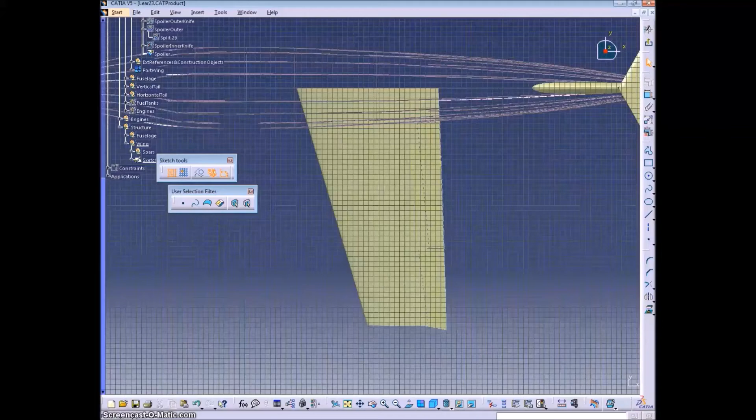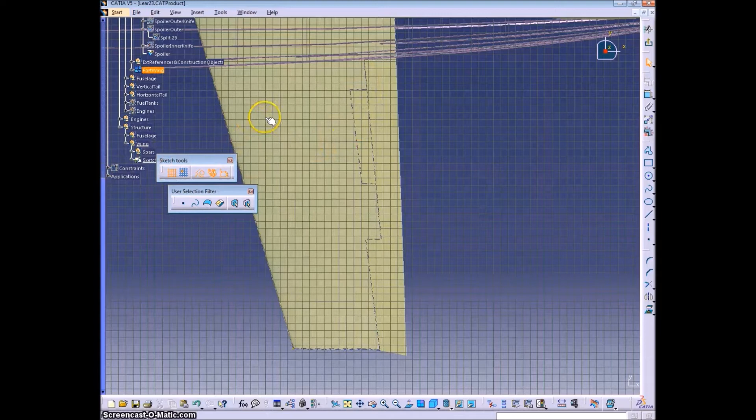This video will show how to add ribs to the wing structure. It is essentially the same as creating the spars, except the lines will be parallel to the chord of the wing. But we'll start the same way. We're going to make a sketch on the XY plane.

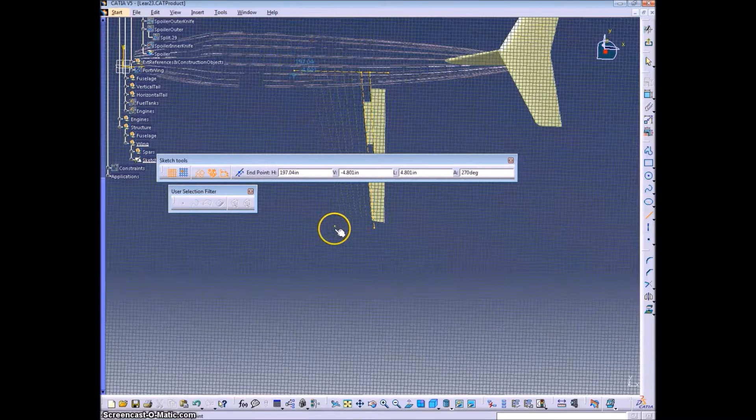And we'll get some guides in here, being the back two spars, since the second to last spar is the last spar on the outboard section of the wing. And then we'll also get the leading edge of the wing. And then we will draw lines which will represent the locations of the ribs. Again, this is a sketch in the XY plane, which will get projected up onto the wing, which will give us the outline of the ribs.

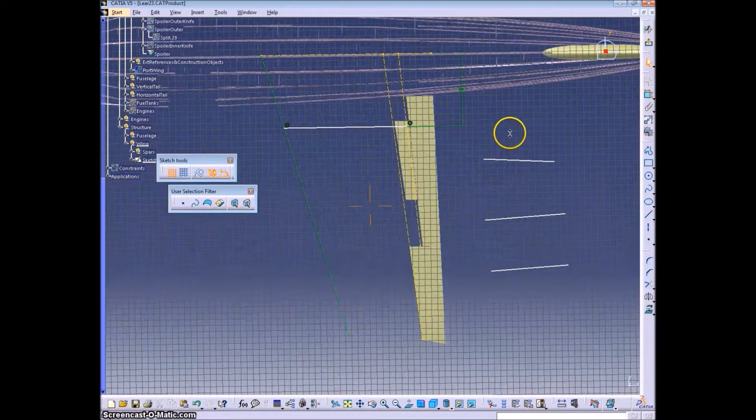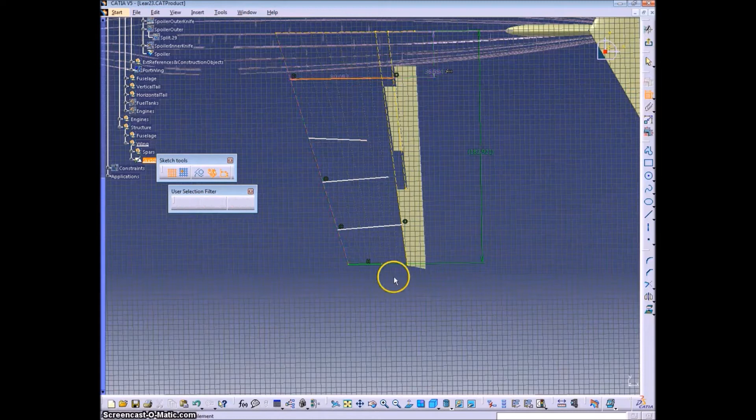We want these lines to be coincident with the leading edge of the wing and then the aftmost spar at that point. And of course we're going to space these evenly, just basing this off of the cutaway drawing. In reality, the spacing might increase as you go outboard, but here this is just a representation. I don't have exact dimensions.

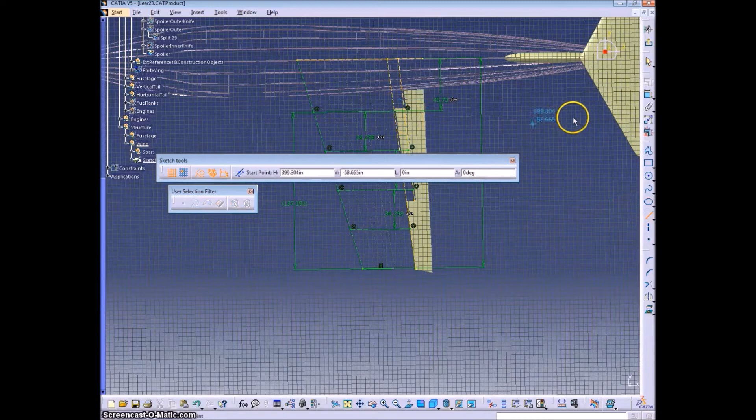And what I'm doing here is creating lines that are a little bit longer than what is necessary, just so when we project it up, we make sure that it intersects everywhere that we want. So I'm going to create these lines to be, I don't know, 1.5 times whatever the dimension is in that location. So do that and then do a formula.

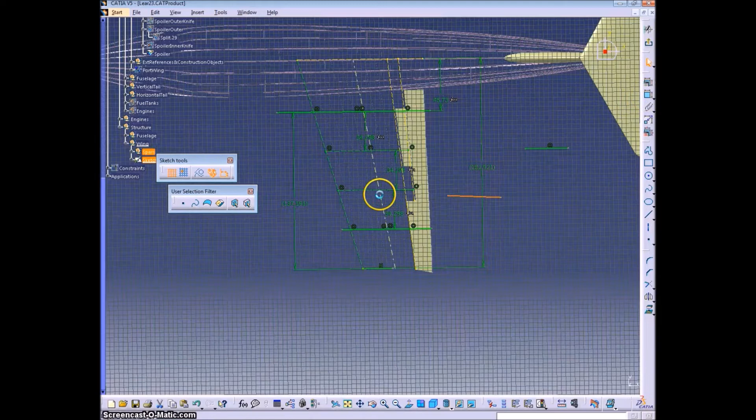Now this is a really, I think, a poor way to do it. I don't know why my past self decided that this would be a good idea, but a much easier way to do this if you want to make the lines longer than necessary is to just draw a vertical line in front of the wing and a vertical line behind the wing, and then make it coincident to those two lines instead of multiplying by 1.5 every time. Either way, it gets the job done.

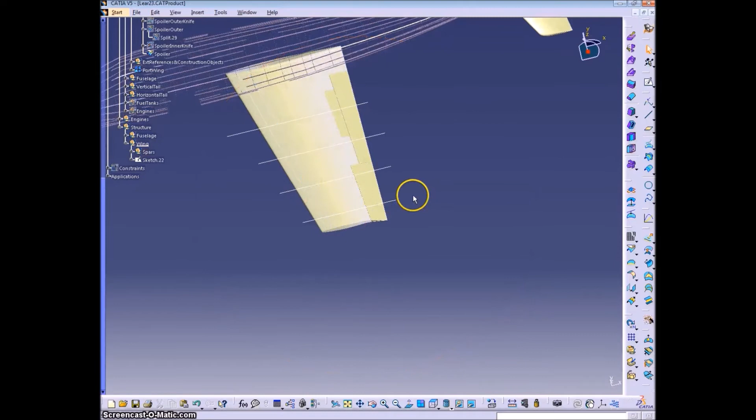What I was describing there is exactly the same thing that I did for the wing, though, where I created a line past the edges. Well, starting from the center line, but past the outboard edge. And I made the spar lines coincident to that. So projecting these up onto the wing, you can pretty much see the outline of what the rib would be. There are a few gaps that we'll have to fill in with lines.

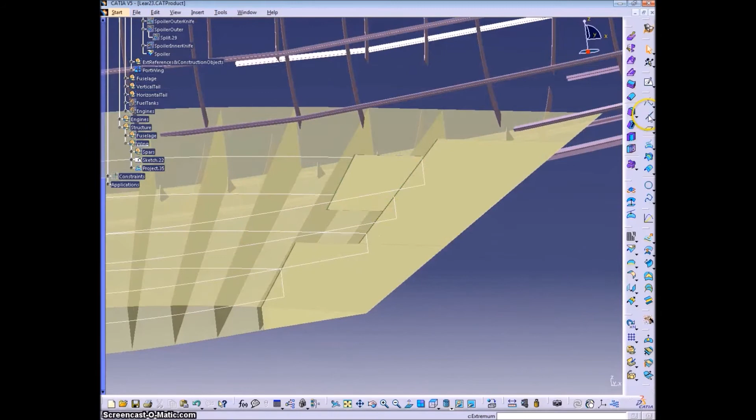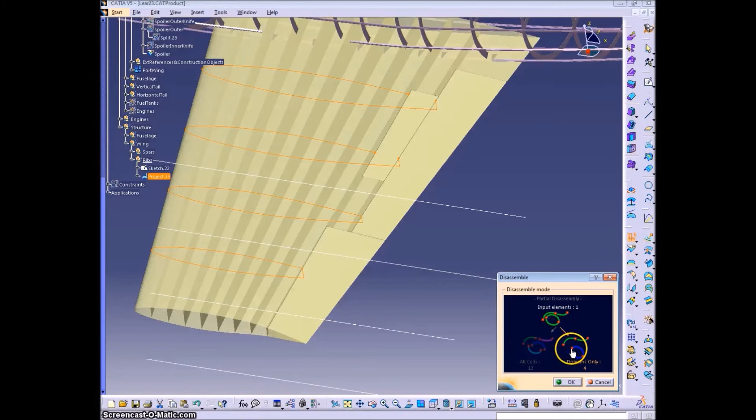But you notice that we have a vertical riser part in the back because of the closed out edge we got from filling in the back edge when we cut the ailerons and flaps out. So that's very convenient. And then we'll just fill in these ribs. But to do that, it was a little premature to add those lines because we need to disassemble this first. And we can disassemble it into domains. Or you could do the other option, but domains is easier here, because we're going to want the lines that are connected to be connected when we do the fills.

And now I'll just go fill in all those contours. Make sure to click the lines for the ones where we added lines. And there we have the ribs. Organize the tree a little bit, and then hide all the construction objects.

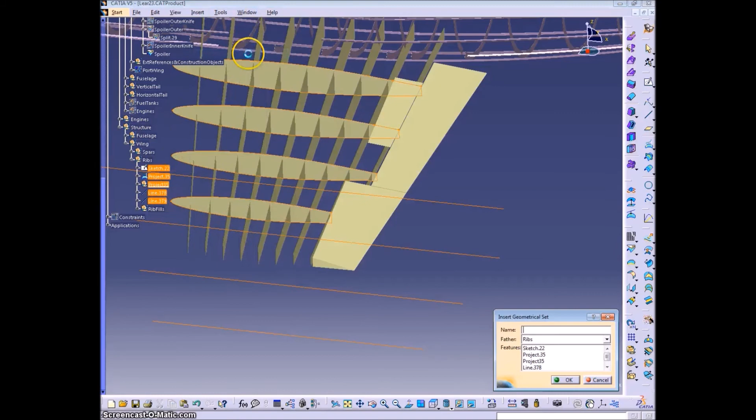That's a nice practice to do when you create all these guidelines and whatnot. You can throw all those into a geometrical set called construction objects or something similar, so you can just hide all those. But if you have to go back and edit something, you just unhide construction objects, and you can find everything you need to edit in there. And so there we have a wing with structure.